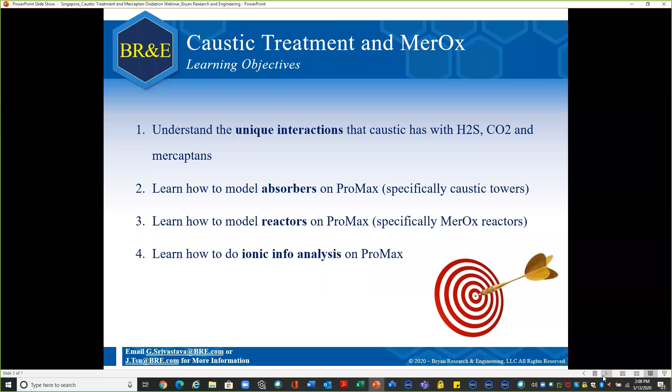Fuel or fuel gas in any system or any operating plant around the world needs to meet certain specifications before it can be sent to end users for consumption. So far, in the last 6 to 7 webinars, we have focused on how we can reduce the water content to acceptable levels. We did that through the hydrate suppression webinar. We also saw how we could remove H2S and CO2 to appropriate levels to prevent corrosion and environmental implications. And we did that in the webinar of amine sweetening. We also saw how we can bring down our fuel heating value or dew point conditions or delivery pressure conditions in the NGL fractionation train and demethanizer webinar.

Today, we will be focusing on the next set of contaminants which can make its way to fuel gas or any kind of fuel, even liquid fuel, and how we can treat those contaminants. So today's focus is going to be on the next set of contaminants, namely mercaptans. And the most common treatment that is used around the world to treat mercaptans is caustic treatment. So we're going to focus today on removal of mercaptans.

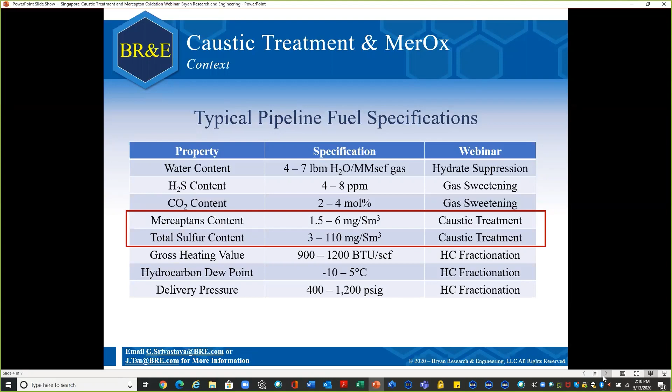On ProMax, as you guys would have seen over the last few webinars, or even our existing customers who've been using ProMax for a whole bunch of years, you might be aware that ProMax has a bunch of solvents available in its database for handling any kind of unit operation, specifically with regards to removal of contaminants. We have the generic amines, primary, secondary, tertiary. We have proprietary amines from Huntsman, Dow, or Shell. We also have physical solvents such as DEPG, NMP, propylene carbonate, methanol, sulfolane. We have potassium carbonate as well, which are employed in certain operations around the world.

However, today's focus, as I've reiterated, is going to be on usage of caustic, which is basically a solvent that mixes NaOH around 10 to 20% with water. And as we have discussed in the previous slide, caustic is majorly used for the removal of obviously small amounts of H2S and CO2, but majorly sulfur components and mercaptans. And we will be seeing how that can be modeled on ProMax. All right.

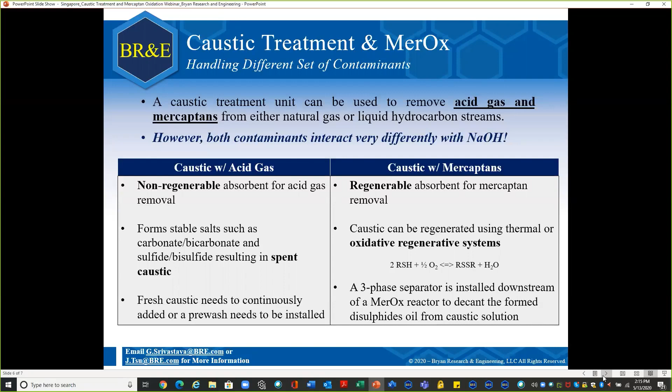All right, and in this contactor, what is basically happening is we have my sour fuel that comes in from the bottom, my fresh caustic that comes in from the top, and if your tower is designed well, your acid gas and most importantly your mercaptans should make their way into the rich caustic phase. All right.

Then, to ensure that you can regenerate your caustic, we send in a stream of air. So your air and your rich caustic stream are together sent into a Merox reactor. The Merox reactor is the reactor where you will be carrying out the reactions which I showed you in the previous slide, which is basically mercaptans plus oxygen gives you disulfide oil plus water.

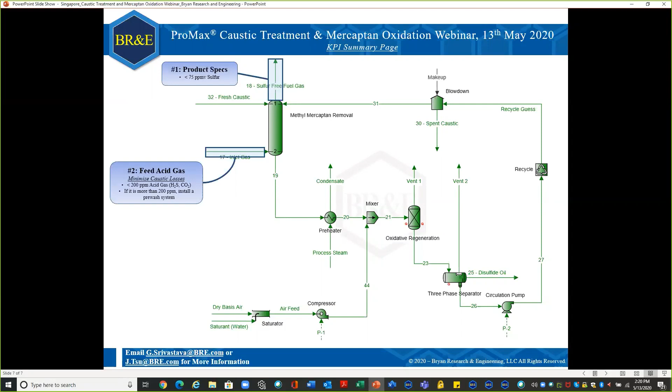The mercaptan extractor itself, the tower itself: if you're trying to sweeten or remove mercaptans from a liquid fuel, ProMax has the capability of modeling LLE towers, and usually LLE towers are packed. We have commonly seen Raschig ring packing around 10 to 12 meters that is usually installed around the world.

If you're trying to remove mercaptans from a vapor fuel, then again, we have the capability of VLE towers on ProMax, and anywhere around 2 to 4 ideal trays or 6 to 10 actual trays should do the trick for you. Again, these are very short towers, and just because of the basicity associated with caustic, short towers should do the trick. So LLE towers, usually Raschig ring packings, 10 to 12 meters tall, and VLE towers around 2 to 4 ideal stages or 6 to 10 actual.

Fresh caustic needs to be put into your system. As I said, if there is H2S and CO2 in your feed, that will continuously result in the formation of heat stable salts, and that will result in spent caustic. And to ensure that you're always making up that lost caustic in your system, some amount of fresh caustic needs to be constantly put into your system, and that is a disadvantage with caustic handling of acid gas.

Usually the flow rate of the fresh caustic stream is around 0.1% of your actual recirculation rate of caustic in your system. So if you're having 50 gallons per minute of caustic being circulated in your system, 0.1% of that should do the trick for your fresh caustic to ensure all the spent caustic is made up in your system. Again, this is only necessary if you have H2S or CO2 in your feed, not necessary when you have mercaptans, because mercaptans and caustic result in complete regeneration of caustic without any issues.

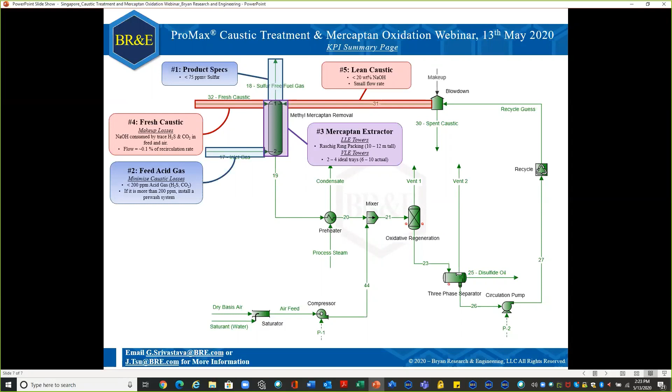Again, that's the advantage of a simulator. You can always start off small and then play around with various trials and tribulations and see where you reach. But a good starting point is around 5 to 15 gallons per minute just to get the simulation started.

The rich caustic stream that comes out at the bottom of your mercaptan contactor, again, as I said, this is going to be the topic that's going to be reiterated multiple times during this webinar. You do not want too much of your heat stable salts being formed in your rich caustic stream, because more and more heat stable salts being formed is going to put more load on the fresh caustic stream that needs to be input into your system to make up that loss.

So usually we have a rule of thumb for the amount of sulfide salts that can be formed in your rich caustic stream. And a good KPI for that is around 0.28% of sulfide salts. If you're more than that, then you know that you have too much H2S or CO2 coming into your stream. And therefore, based on KPI number 2, you need to install some kind of pre-wash system to reduce the acid gas feed into your tower.

All right. And one of the objectives which we discussed at the beginning of the webinar is to see how we can calculate the amount of salts in your rich caustic stream. So I will be coming to how to do that on ProMax in a second. Just remember, you do not want high amounts of heat stable salts in your rich caustic stream.

So we have completed the caustic contactor part of the system. Now we come to the second part, which is the Merox part, to regenerate my caustic. And as I said, there are multiple ways, either through thermal means or oxidation means, and today's focus is going to be through oxidation means. So if we inject some amount of air to the oxidative regeneration reactor, we should hopefully be able to complete the Merox reaction. So how much air should be used? Usually our recommendation is 10% excess over the amount of mercaptans entering the system.

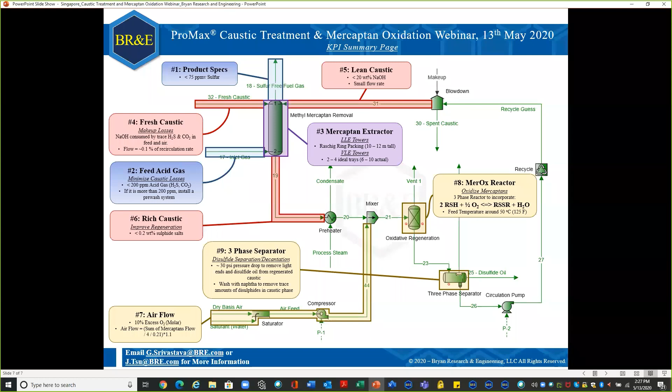Finally, we have a circulation pump because you will be having a 3-phase separator upstream, which would have dropped the pressure of your system. And just to ensure that your lean caustic can go back into your contactor, we need a circulation pump to bring back the caustic pressure high enough to be fed into the scrubber.

All right, so these are 10 important design considerations that we would need to take care of in setting up such simulations on ProMax and designing such systems with the help of ProMax. Before I open up ProMax, let me just go through a few questions that have come in. If I can answer them, I would answer them right now. Otherwise, we can always take them offline.

So I see there are certain questions of how much naphtha can be used to remove your disulfides. Again, there is no real rule of thumb for how much naphtha can be used. My answer to that would be that's why we have a simulator. You can always start off with a small flow rate of naphtha and see whether that's doing the trick. If not, increase your naphtha feeding into the system. Again, there is a cost benefit analysis associated with this.

Putting in more naphtha would reduce your CDU throughput, because you do not want to remove so high an amount of naphtha from your products. So again, I would say use the simulator to its advantage. We have all the equilibria and thermodynamics for you, but I would say a very, very small flow rate should be the starting point.

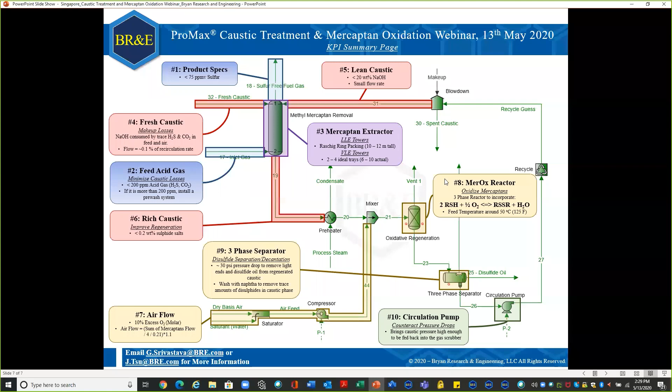All right, so at this point, let me open up ProMax just to show you guys how a Merox unit can be modeled. Can I get the BRE consultants to confirm that they can see the ProMax screen?

All right, I think everyone can see the screen. So I've just redrawn the Merox system again on ProMax, and let me go through step by step what a BRE consultant would do in setting up the simulation, so that you can get a real vicarious understanding of how the system is set up.

Step number one with any new simulation on ProMax is to activate your environment with the appropriate thermodynamics. So how do we do that? Step one is to click the active environment on the top left of your screen. After you click that, you should see an active environment window appear. And again, selecting the most appropriate thermodynamic package is probably 50% of your battle won. If you do not select the right package, you're going to face a lot of issues in getting appropriate results.

Now, ProMax, since we are leaders in sour fuel handling and sour gas treatment and everything associated with acid gas and sulfur, we have proprietary packages concerning various units handling these contaminants. If you're modeling an amine sweetening unit, we have the amine sweetening package. If you're modeling a caustic treating package or a Merox unit, we have the caustic treating packages available here. If you're modeling a sour water stripper, we have the electrolytic packages available right here. If you're modeling a sulfur recovery unit, we have the sulfur packages available at the bottom. So depending on which kind of unit you're modeling, you can use the appropriate package.

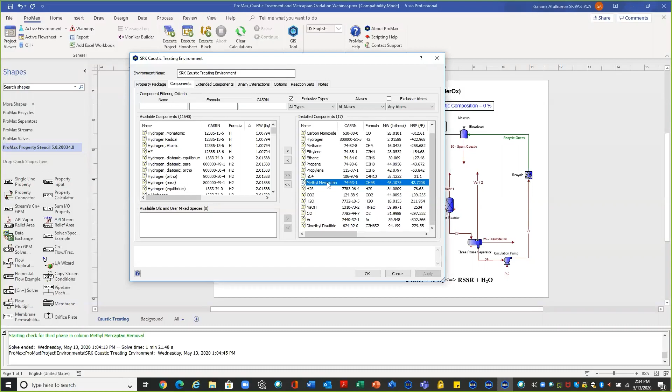And again, you do not need to add any salts. ProMax will take care of the salt formation for you because we have selected the appropriate package, and the ionic analysis will take care of those salts. So just remember to add in your feed stream components, your reactants, which is air, namely nitrogen, oxygen, argon, and your products, which are the corresponding disulfide oils vis-a-vis the mercaptans coming into your stream. In this case, only methyl mercaptan is there, so I'm only going to add dimethyl disulfide. I can then click OK and ensure that everything is selected.

All right. So now, if you can see, I have a sour fuel stream coming in. It has around 1500 ppm of methyl mercaptan, and a very small amount of H2S. And if you remember, the rule of thumb we said was to have less than 200 ppm of acid gas. So we are fine here. We do not have high amounts of H2S or CO2, but we are considerably over the limit for mercaptans, given that our sweet fuel should have less than 75 ppm of mercaptans.

So therefore, there is a need to have a caustic system. All right. So step one is to put in some amount of caustic flow and caustic composition. And again, the rules of thumb tell us to start small. Always start small. It's better to start small and then ramp up your system than to start big and then figure out, hey, I would have missed out probably a much more conservative result previously in my simulation. So start small is my suggestion to all users.

All right, so caustic composition, let's say a small concentration of 20 weight percent. So I just put in 20 weight percent of caustic. Let's put in a small flow rate of say 5 gallons per minute. And if you remember, since there is small amounts of H2S coming in, it's not huge, but we can't neglect the fact that there is small amounts of acid gas, namely H2S coming in.

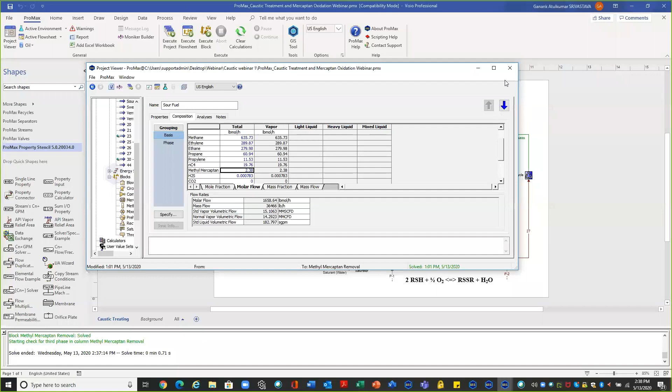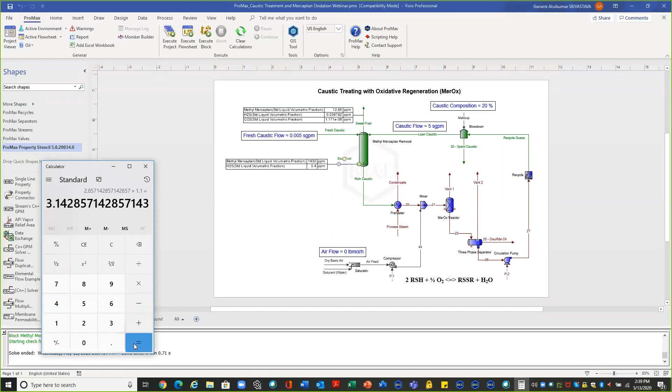So if I now quickly take up a calculator, 2.4 moles divided by 4 would give you the amount of oxygen, divided by 0.21 would give you the amount of air, and if you have 10% excess, I can multiply that with 1.1. So a good starting point is around 3.14 pound moles of air. I hope everyone's clear on how I got this amount of air for my Merox reaction. So I can just go into my air dashboard and let's put in 3.2 pound moles of air. All right. So let's proceed. We have put in my airflow. My rich caustic is coming in, and now let's go to the Merox reactor.

If I double click my Merox reactor and just increase the screen, you can see that we have been asked to make a few selections. The first selection is the type of reactor. All right. And if you drop down this menu, you can see that there are many kinds of reactions available. We have the equilibrium type, we have the conversion type, we have the Gibbs minimization, plug flow. For the Merox case, we will be using the conversion reactor.

All right. If you guys remember from the sulfur recovery webinar, we used the Gibbs minimization reactor because ProMax already has the required Claus reactions, sub-dew point reactions, burning reactions, redistribution reactions already inbuilt for SRU units. Just because there are different kinds of mercaptans involved and different oxidation reactions involved, we have not done that for Merox reactions. So you have to manually put in those reactions. Again, I would like to reiterate that Gibbs minimization might work for methyl mercaptan, but if you have heavier mercaptans like ethyl, propyl, or butyl mercaptans, we would not encourage you to use Gibbs minimization.

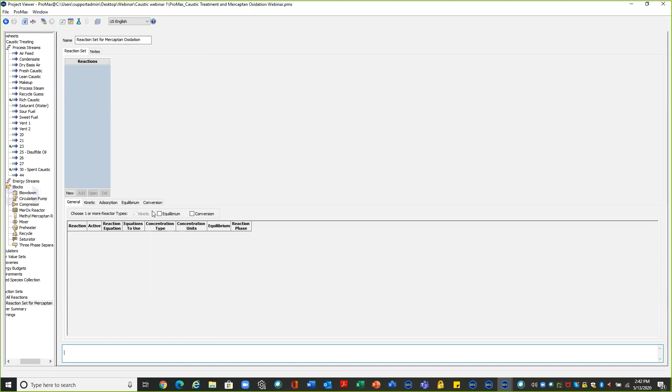Once I've added in the reaction set, I can click new, and it will ask me how to configure this reaction. So let's name my reaction 1 in this reaction set as methyl mercaptan to dimethyl disulfide. Again, please name all your reactions, because if you have multiple mercaptans, you will have that many oxidation reactions. And if you don't name it, you'll get confused as to which reaction belongs to which mercaptan. So I'm going to name it as methyl mercaptan to dimethyl disulfide oil.

That's step 1. Step 2, I would add in all the components involved in the reaction. If you remember the reaction, it will be methyl mercaptan plus oxygen gives you dimethyl disulfide plus water. So I can just select my components. I can either use my drop-down menu and find the components, or, since everything on ProMax is VBA enabled, you can type in the components and it will do the trick for you. So let me add in my first reactant, which is methyl mercaptan.

That's added in. The second reactant is oxygen, so I add that in. My first product is DMDS oil. Add that in. And my second product is water. Hopefully, so far, everything is quite intuitive. Then I need to put in the stoichiometry involved in the reaction. And if you remember from the slides, which I will be sending every one of you, I'll be sending the slides as well as the ProMax model for your reference.

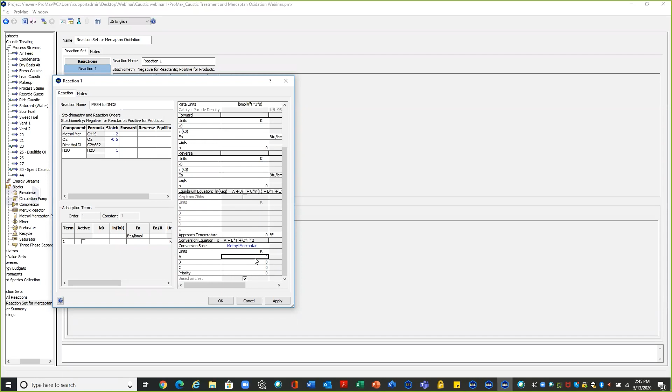And that's it. I can then click OK, and my reaction has been configured. It has not been set up in my environment; it has been configured. After that, ensure that you have selected that this reaction is a conversion reaction here. I am not interested in equilibrium and kinetics, so I can deselect those. And now I'm ready to activate the first reaction, which is methyl mercaptan to DMDS.

Now, if you have multiple mercaptans, like ethyl, propyl, butyl, pentyl mercaptan, you have to add in that many reactions, and you would follow the same steps. All right.

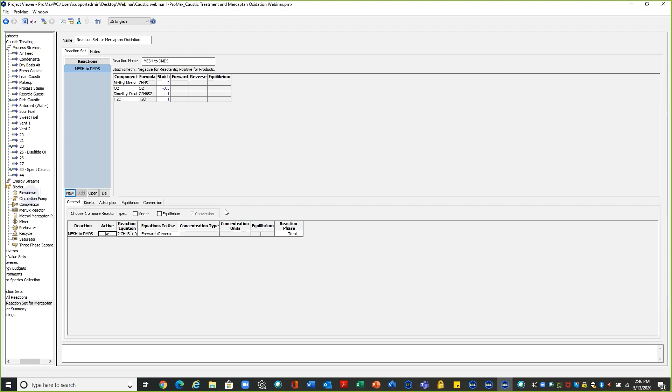Add in your reaction by clicking new here, put in your reactants and products, put in the stoichiometry, ensure that you have selected complete conversion through the conversion equation, and then activate your reaction only for the conversion reaction. That's it. All right. And I can close out from this window.

And now there's one more small step in the active environment section, which we saw in the beginning of the ProMax demonstration. After you select your package and your components, all the way at the end, there is a reaction set tab. So you have to select that. And you have the reaction set for mercaptan oxidation available now.

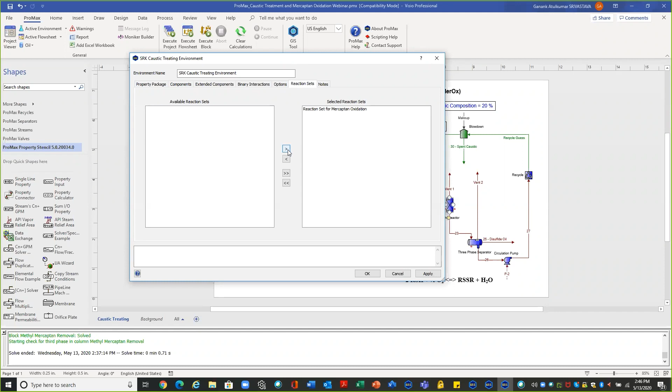So once you have configured it and activated it, the final step is to install this reaction set into your environment. So I can select this and install it into my ProMax environment. And once it is installed, you can click OK. And hopefully now, once I double click my reactor, under reaction set, you should see the new reaction set that has been installed right now. Reaction set for mercaptan oxidation.

And that's why I always encourage everyone to name your reaction sets, name your reactions so that you're aware of what you're adding in and what you're not. So now I can drop down my menu and click my reaction set.

So just to give you a bird's eye view of what this is, a reaction set is a set of multiple reactions. Within the reaction set, I have only added in one reaction, which is methyl mercaptan to DMDS. A reaction set can have multiple reactions. So if you have multiple mercaptans, I would add those many reactions under that reaction set. So selecting this reaction set would enable all the reactions to participate in this particular block. So hopefully I've made myself clear on that.

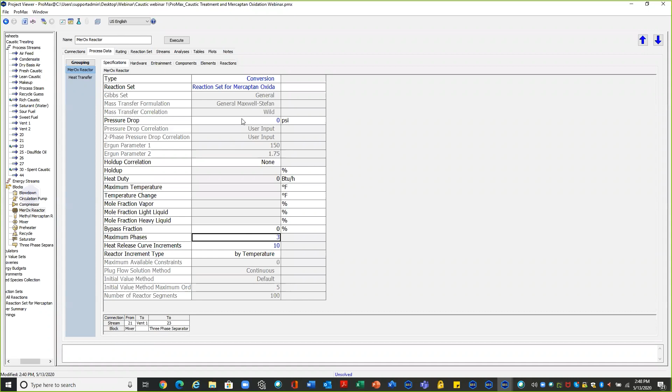Finally, make sure that the maximum phases of this reactor is 3. By default, if you install a new reactor on ProMax, it would show 2. But as we've discussed through the presentation, there is the formation of an oil layer, a hydrocarbon layer, and therefore please ensure that your maximum phases is selected to 3. All right. You can play around with the pressure drop and bypass fraction if you'd like, but just for demonstration's sake, I'm going to leave it at 0% for now.

Bypass fraction, for those who are interested, is just to ensure how much of your reactants are not going to participate in the reaction at all. So if there is some inefficiency associated with your reactor and your vendor tells you that there is only 99% of reaction possible, I would put in a bypass fraction of 1 to 2, and that would add that level of conservatism to my reaction. But again, for demonstration purposes, I'm going to leave it at 0.

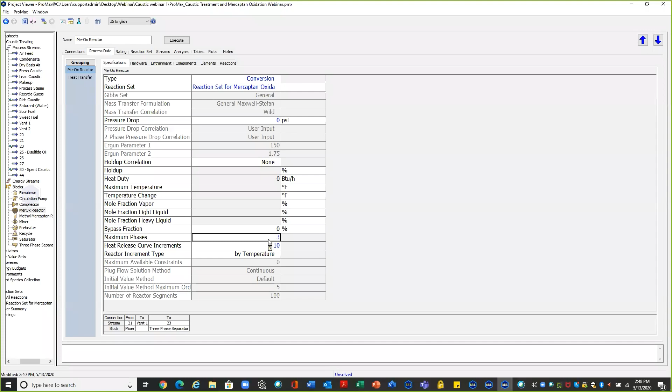All right, so I have configured my Merox reactor, and now I have everything set up. I've already put in my pressure drop for my disulfide decanter, a pressure change for my pump, and I can go ahead and click execute flow sheet. This will take some time to converge, and while it is converging, I will just answer some questions that I can see on both WebEx and Zoom.

One question that I've been asked is, can we model a pre-wash system in order to remove small ppms of carbonyl sulfide and H2S? Absolutely, you can. Any system which involves caustic pre-wash, amine pre-wash, any kind of water wash as well, all of those systems can be modeled on ProMax absolutely fine, no issues. Yes, there's a question on, can caustic remove carbonyl sulfide and carbon disulfide? Absolutely, it can remove those as well.

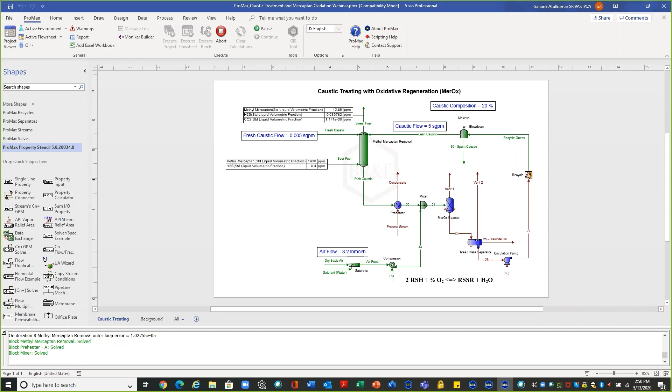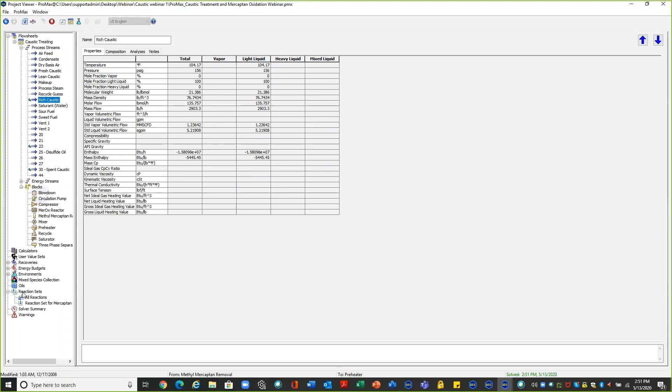There are some questions on how I added the reaction on ProMax. Hopefully, through my demonstration, you were able to pick that up. Clicking any stream on ProMax would give you the project viewer, and the project viewer would have your nice file explorer on the left-hand side. And if you can see on the left-hand side, all the way to the bottom, I have my reaction sets. All right, and just right-click this reaction set, and you can add your new reaction set.

So I will be showing this in a second. All the heat stable salts will be automatically taken care of within ProMax. And again, if you double click any stream on ProMax, either the spent caustic stream or the rich caustic stream, you should be able to see, I will show it to you in a second, how we can configure an ionic info analysis, and also how we can configure to check the amount of salts, specifically heat stable salts that are being formed.

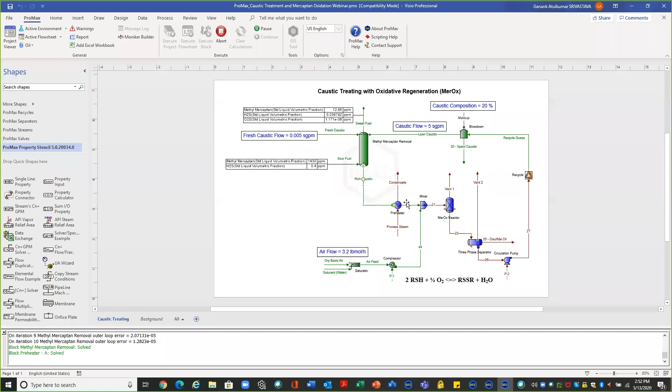And at any point if those heat stable salts are beyond our level, then you can take the required steps by adding in some fresh amount of caustic or increasing your flow rates to ensure that that is taken care of. Or as I always like to suggest, installing a pre-wash system upstream of your caustic tower also does the trick.

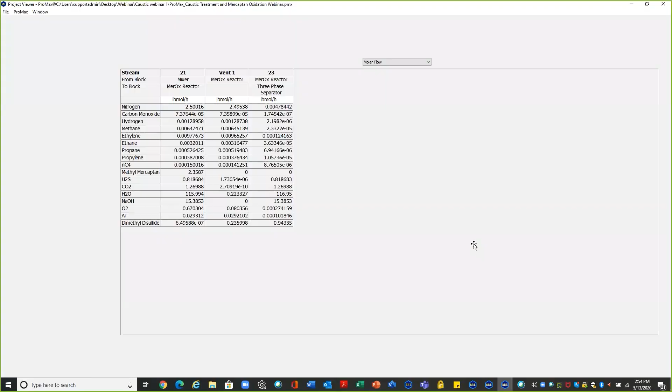In my 3-phase separator, because of the pressure drop, I would want my mixed liquid stream to be decanted into 3 phases, namely vapor, oil, and aqueous phase. And I would want to ensure that maximum amount of my disulfide oils are present in my hydrocarbon phase. So if I double click my separator, I can go to my streams tab again, go to my composition tab. All right. And you can see that in my disulfide oil layer, almost 98% of my dimethyl disulfide is getting decanted out. So that means that my separator is also working just fine.

And my aqueous stream, which is my stream number 26, if I go back to mass fraction, is having 21.8% of caustic and 75% water, which is good enough to regenerate back into my mercaptan contactor. So my regeneration Merox system is working just fine. My reactions are working fine. Therefore, I can be very well assured that the amount of air that I've put in was stoichiometrically sufficient, and my caustic is getting regenerated back.

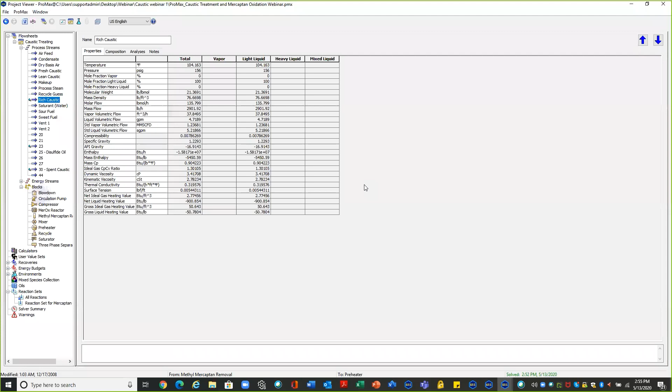Now, a few things. If you guys remember, there were a few KPIs with regards to heat stable salts, which we have to make sure that we are not exceeding. So how do I set up that analysis? I can double click my rich caustic stream. I can go into the analysis tab. And right now I already have the ionic info analysis set up. But for people who do not know how to set this up, I can just demonstrate that for you.

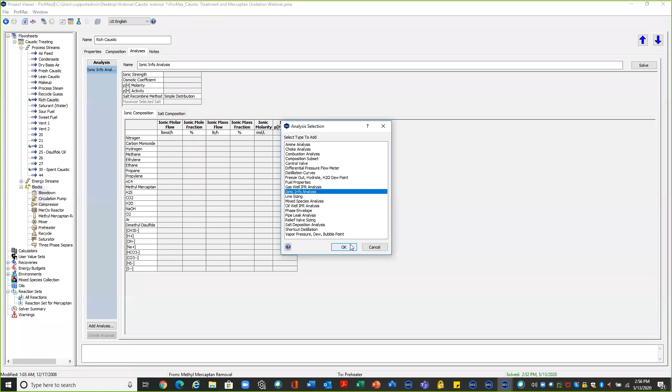Go ahead and click add analysis. And when you add analysis, there should be an analysis called ionic info analysis right in the center. You can click OK. You can go ahead and click solve. Once you click solve, I like going to the second tab, the salt composition, and you can see right at the bottom all my carbonates, my sulfide salts, and their respective concentrations available.

All right. So if I check my sulfides, which are the last two, you can see that the concentration is around 1.5 and 0.01%. If I check my carbonates, you can see that it is 4.63 and 0.0014%.

If I can do this analysis on the spent caustic stream as well, that would be a good analysis, right? Go ahead and click analysis, click solve on the ionic info analysis, salt composition. You can see that the spent caustic stream is having, again, the same amount of sulfide concentrations and the same concentration of carbonate.

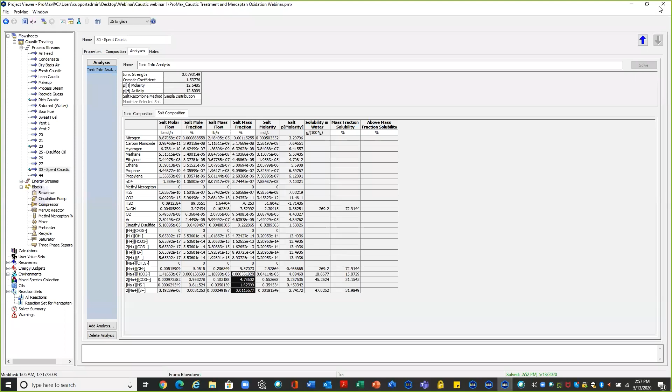If at any point you would want to reduce these heat stable salts in your system, the knob that you would want to change would be your fresh caustic stream. So again, we have certain recommendations of how much sulfides we would want in your spent caustic, and to ensure that that is reduced, you can always play around with the fresh caustic stream right here. Again, it really depends on what your end user wants. And if you're an operating company yourself, it would depend on your cost benefit analysis.

Are you willing to invest in a pre-wash system to remove those H2S and CO2 upstream, and then you do not need to worry about heat stable salts in a caustic unit? Or are you willing to invest in a constant inflow of fresh caustic to prevent that buildup of heat stable salts? So it really depends on what your requirements are and what your constraints are. But that's how I would select or configure my analysis to calculate the amount of carbonate and sulfide salts present in my system.

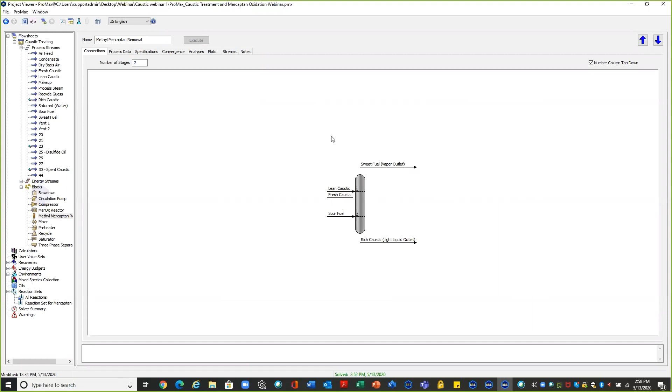How can I size my tower? Well, if I have to size my tower, I can just go ahead and double click my tower right here. As I said, Mercaptan towers are usually 2 to 4 ideal stages, or if you're doing actual stages, that would mean around 6 to 9 actual stages. And sizing it is, again, very, very simple on ProMax. I would double click into my tower, go into process data.

First things first, select which mode you want to model your tower on. I've done it on ideal stage mode, but feel free to do it on mass and heat transfer mode as well. The only difference is that on ideal stage mode, you would be using ideal stages. Therefore, you need to ensure that you have some amount of efficiency taken into consideration. And for absorbers, anywhere between 25 to 35% efficiency is a good rule of thumb to follow. And if you're on the mass and heat transfer mode, put in the actual number of stages. Anywhere between 6 to 9 should do the trick for you.

Now, if you want to size your Mercaptan tower, I would go to hardware section under general. And again, if you want to size it, put in a target flooding that you would want in your tower. I would want a 75% flooding in my tower on both my stages. I would want to be conservative and give my real to ideal stage ratio to be 4, which corresponds to 25% efficiency. And a system factor is the tendency of foaming in a caustic tower. Usually BRE recommends around 0.65 to 0.75 as the system factor for caustic towers.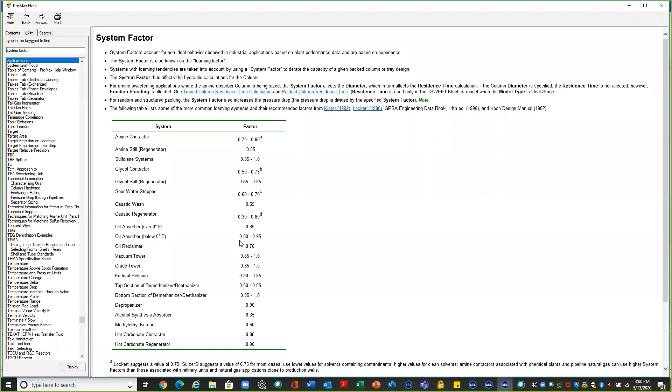If at any point you are not able to remember this value, you can always go back to our help file, which is an encyclopedia of anything chemical engineering, and type in system factor. And you can see this will help you in sizing any kind of tower with any kind of solvent that you're using. So if you're using a caustic wash, around 0.65 system factor is what we suggest. If you're using an amine contactor, those recommendations are there. Sour water strippers, glycol contactors, CDUs, VDUs, so on and so forth. So for my caustic tower, I'll just put in a system factor of 0.65.

So I've put in my general hardware information targets that I would want. And remember, I'm sizing this tower, so I've put in a target flooding so that ProMax can give me the diameter. If I am rating my tower, I would put in the diameter so that ProMax would calculate my flooding. And another important point at this stage is that I have selected my hardware to be tray. I can change my hardware to be either random packing or structured packing, depending on your requirements.

Since I've selected tray, I go into my tray folder right here and give it some more information with regards to tray spacing and weir height information. You can also change the tray type from sieve to round valve, depending on your requirement. But I'm just going to put a usual tray spacing, which I see in the industry, around 0.5 meters for both my trays, weir height of around 3 inches, and leave the remaining values at the default suggestions by ProMax. And then when I go back to my general settings, I can click solve, make this into meters, and ProMax gives me around 1 meter as the size of my Mercaptan tower. So this is how I would size my Mercaptan tower, as simple as that.

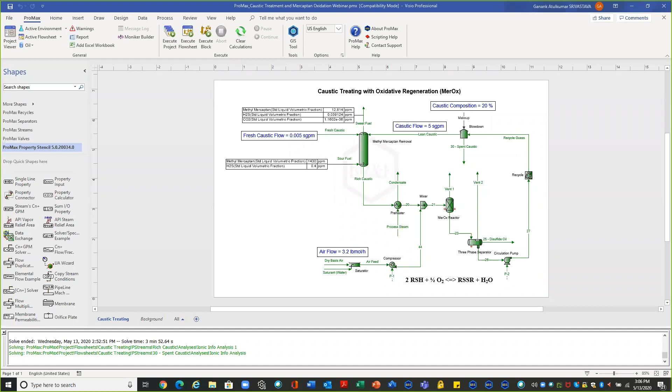Yes, this tower can also be modeled as an LLE tower. As I've shown, if you want to model an LLE tower, you can double click your tower here, and under flash type, you can drop down this menu to select LLE for any sour liquid streams that need treating.

Just to clarify, all the units involved in this system, be it the contactor, the heat exchanger, the separator, can be sized on ProMax. We did a short webinar on Monday going through that. So even your lines, for that matter, your pipelines, your rich caustic lines, your lean caustic lines, all of these lines can be sized. And again, if you have any questions on how to size, please reach out to us. We will be more than happy to help you to size those units.

The reactors on ProMax can also be sized, but again, it's not as intuitive as our heat exchangers and columns and separators. It is, as my colleague Joachim said on Zoom, more an art than science. You have to play around with the aspect ratio of your reactor, which can be done by double clicking the reactor.

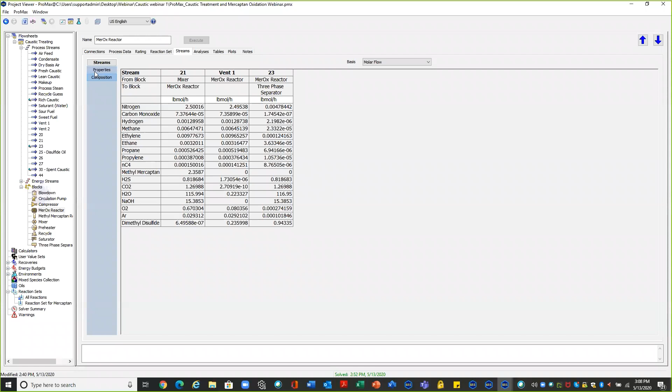Under process data, under hardware, you can take care of this area here. Again, I'm not going to go into the details of how sizing is done, but you have to basically ensure that your pressure drop that is calculated on ProMax is not going overboard than what is recommended for your reactor.

All right, so please send in your questions regarding sizing, and we can do that for you. Again, more on it will take a bit of collaboration between both of us to ensure that those sizing requests are put in. The help file, yeah, absolutely.

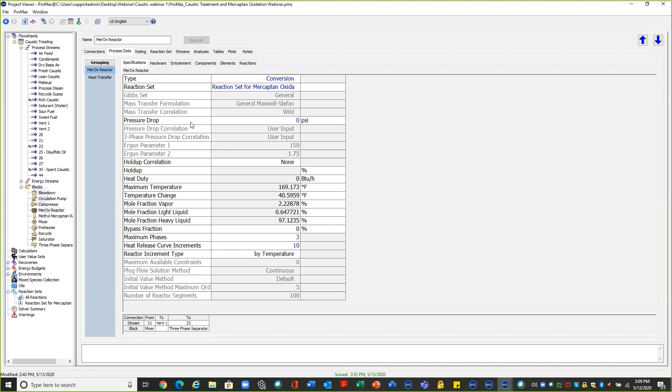The help file is very, very comprehensive, and all our customers who have ProMax installed, you guys can read tons and tons of process engineering related information on our help file. It talks about design suggestions, optimization suggestions. It even goes into how to set up various things on ProMax, various popular process units like SRU units, caustic units.

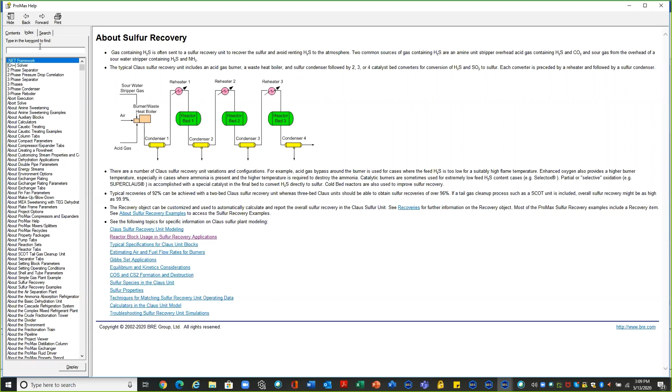You can just go ahead and click whatever you want to talk about. Like if you are interested in caustic units, you can click caustic units, and it goes through all the details, both process related and simulation related, of how you would want to set it up. So again, a simulation database of a lot of information, as well as engineering database for designers and operators to keep reading.

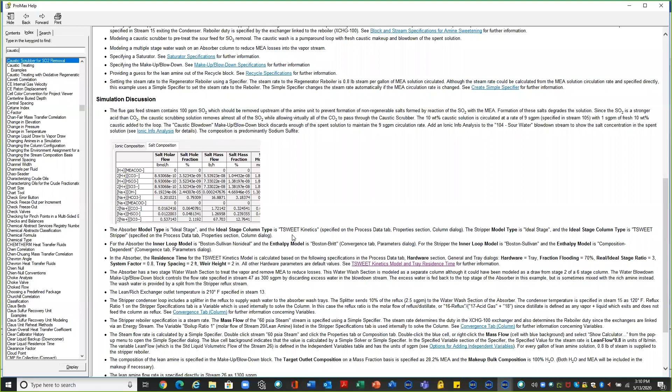So LLE towers on ProMax are sized slightly differently than regular VLE towers. How I would model LLE towers is, I can maybe show it to you guys. Right now, obviously, we're having vapor coming into our system, but let me just take out another tower and see if I can show you guys. All right. So I'm just taking out another tower here.

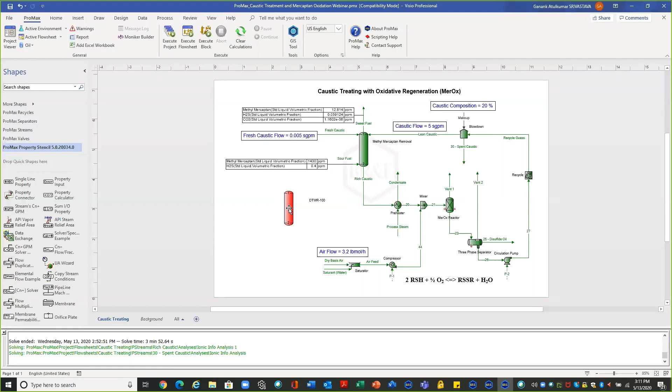And if you have to model or size an LLE tower, if you double click my tower, you can select this to be LLE. All right. However, the minute you select LLE as your flash type under hardware, most of the inputs that were available on VLE towers are grayed out. So how do we size LLE towers?

Now the recommendation for LLE towers is around liquid load. And usually, based on our experience, we've seen that the liquid load in LLE towers should be less than 30 GPM per feet square. All right. So you do not have the flexibility of putting in fraction flooding. You have the capability of putting in a liquid load.

And so based on our recommendation, if you put in around 25 GPM per feet square on both stages, and when you click solve, right now I don't have any streams associated with it, but once you click solve, the diameter will be calculated for you for this LLE tower. So sizing an LLE tower is based on liquid load rather than fraction flooding.

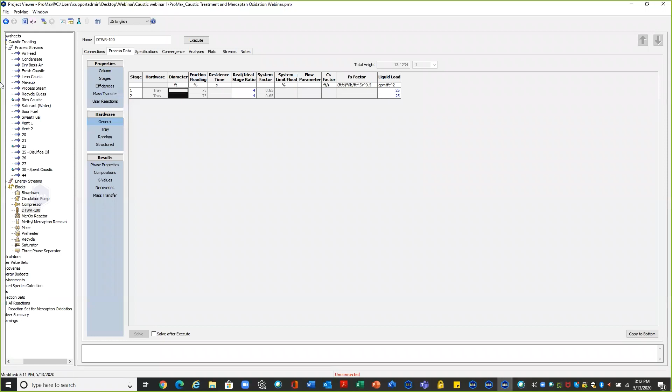How does the oil quality affect the process? Is there any restriction about maximum sulfur or acid compounds?

I am not sure who this person is because I can't see your name. It's, I think, your computer name that has been showing up.

But anyway, yes, there is a direct linkage. Hi, Mr. Giovanni. So yes, there is a direct linkage between the quality of your oil that comes into your system and how it is going to affect your caustic and Merox unit. As I've discussed, if you're having high amounts of acid gas components coming into your system, that is going to result in the formation of heat stable salts.

The formation of heat stable salts will result in the formation of spent caustic, and the formation of spent caustic would reduce the amount of available caustic to treat your mercaptans. Therefore, if you do not have fresh caustic continuously added into your system, it will definitely be affected. And again, as we discussed in the presentation, if you're having high amounts of H2S, CO2 in your feed, either remove them through a pre-wash system or ensure that your fresh caustic flow is high enough to make up for that loss.

These vents can be sent wherever you would want, Mr. Manuel. Again, depending on the composition and the quality of these vents, you can use it for different purposes. If they are meeting environmental regulations, you can just vent it into the air. If they're not, you might have to incinerate it, and incinerators can be modeled on ProMax. So it really depends, depending on the composition of the vent, what you would want to do.

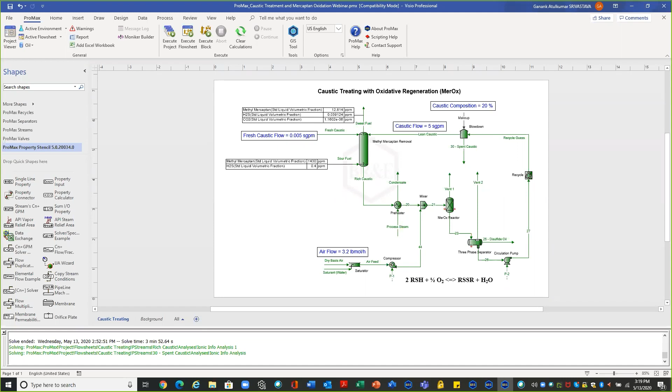What is the O2 concentration in the recycled caustic? All right, let's check that. Let's double click the stream composition. It's close to 0. 6.3 times 10 raised to the power -5. So it's close to 0. And that makes sense. You should have aqueous caustic circulating in your system. Like mass fraction, you can see 75% water, almost 22% NaOH, and trace amounts of hydrocarbons and acid gas as well. All right.

You should have all your gaseous components in your vent. So your nitrogen, oxygen, argon, some amounts of DMDS in your vent. Yeah, again, if you want to check in ppb, we can double click the stream, go to mole fraction, and you can just change these units to ppb. And you can get your ppb amounts right here. And again, if these values are higher than what are recommended by your systems, then you might need to play around with pressure drops, with flow rates of oxygen, so on and so forth. But you can always check as to what the composition of various components are in whichever units you would want.